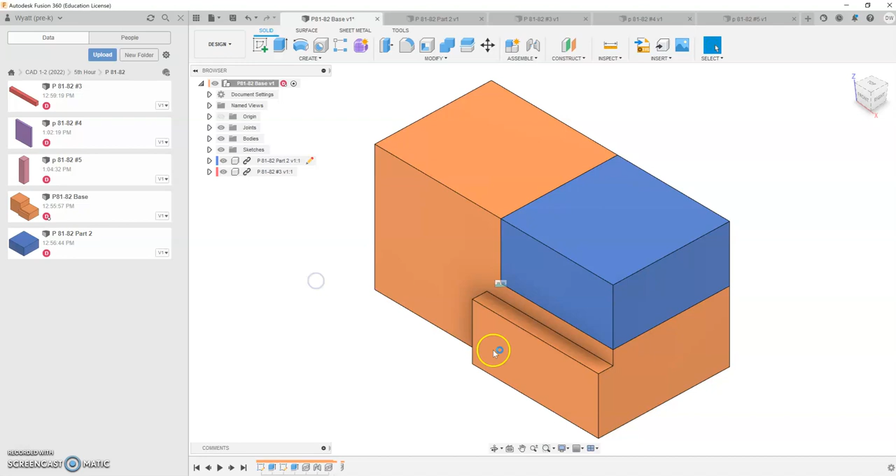Again, I don't want it right on top of there. I'm going to pull it out like so. And just for the heck of it, I'm going to put mine into this position that's a little bit different than yours, probably came in, just in case yours would have came in this way so I can show you how to fix it. So let's say you brought it in this way. I'm going to go ahead and go okay there.

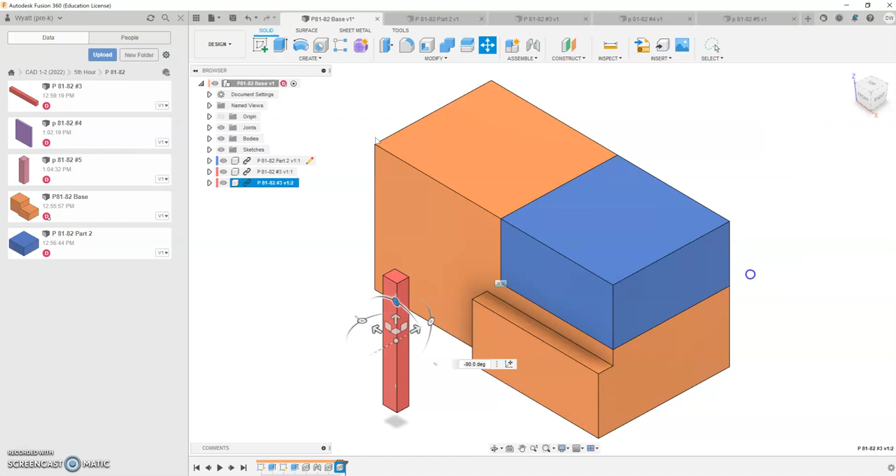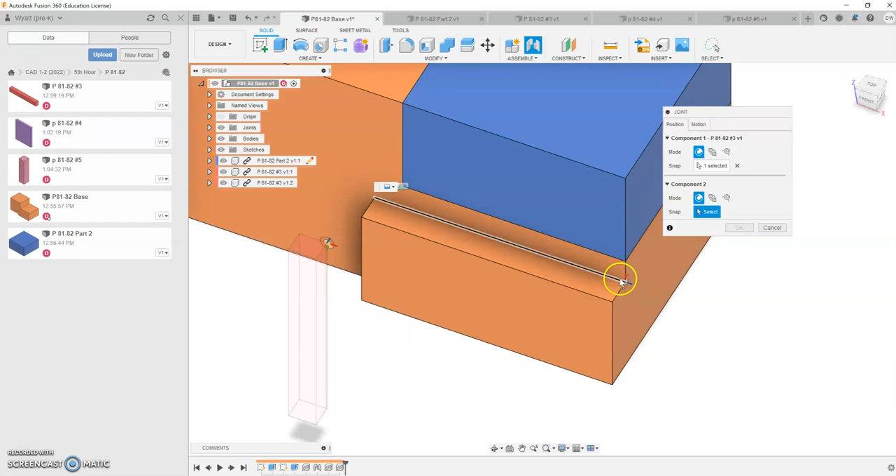So now I'm going to go ahead and do a joint. So let's come up here to my joint. I'm going to pick the back side over here. I'm going to pick this corner on this surface right there. And if I visualize this and rotate it in my hand, that corner should line up right there.

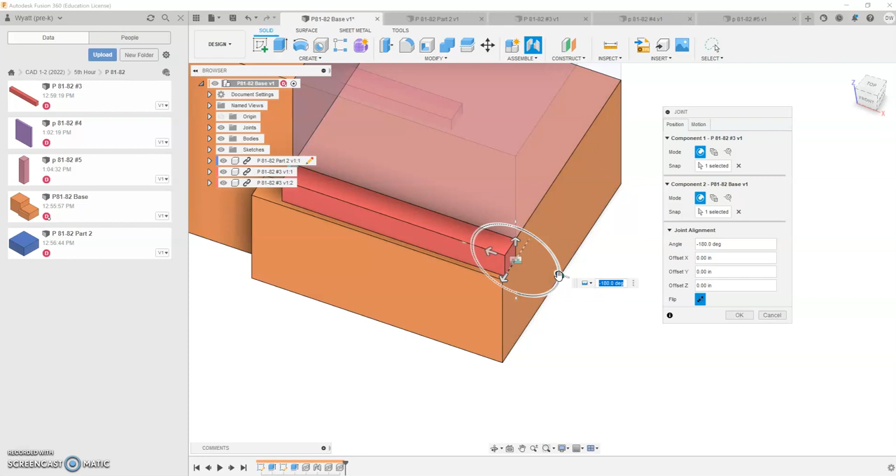Okay, so now it's in the wrong position. But what I can do there is, again, the same things that I rotated with just a moment ago are here. So all you do is grab this one, rotate this piece up like so. And, yep, minus 180 degrees and go okay.

All right, so there's my piece into place. Oh, now, wait a minute. That piece doesn't fit the greatest. I don't know why, I don't know who designed this piece, but for whatever reason, it doesn't fit the greatest. We need to take a look and see what's wrong with that piece.

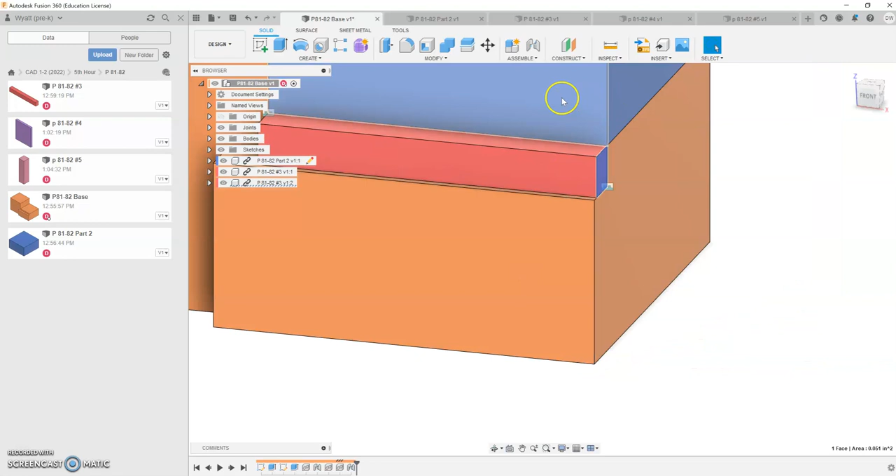So we're going to go up here. That was part number 3. And actually, I guess I could measure this first. Let's see what this block should be here. Right there, that one should be, all right, 0.25 inches. Okay, measure this one, it should be 0.25 inches. All right, so that's good.

So now let's go to our part 3, see what I did wrong. And let's go to our sketch. Well, our sketch measures 0.25 by 2, so that's okay. Let's go to our extrusion. 0.205, goodness, somebody can't type. So go 0.25, go okay.

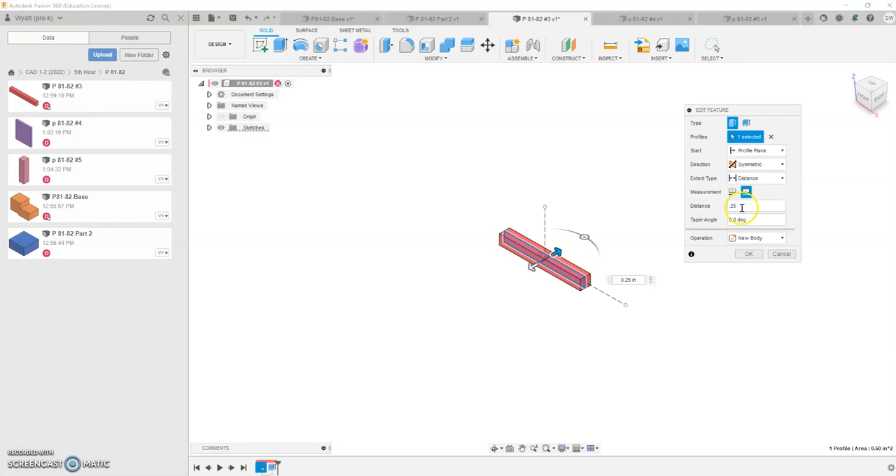It fixed that. Now remember, you do need to save that part. So I'm going to click up here on save and go okay. Come back to my base view. Come back to my base view here. And notice it's still wrong, but I have this exclamation point up there that says it's out of date. So let me update it. And look how beautiful that is. That piece fits in there very nicely.

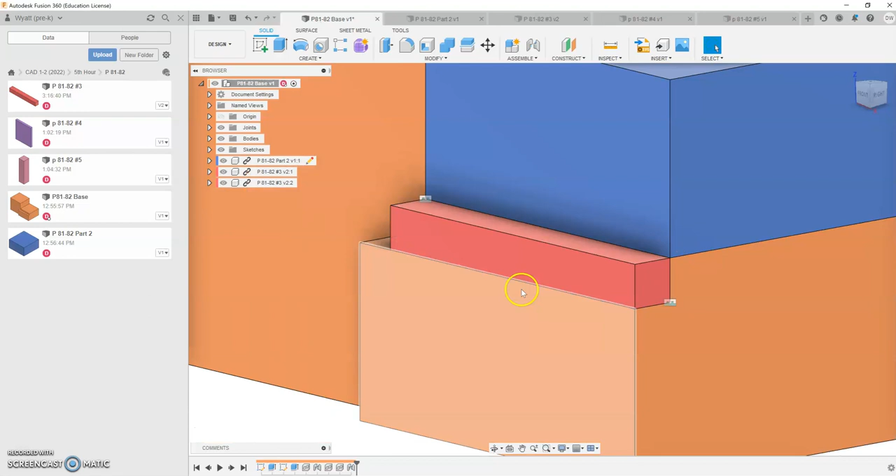Okay, so there's that part. Now let's see what I want to do next. Let me pull in part number, I guess, 4. I'm going to pull in part number 4. Part number 4 is there. I'm going to move this. Whoa, I'm going to move it out in my position here.

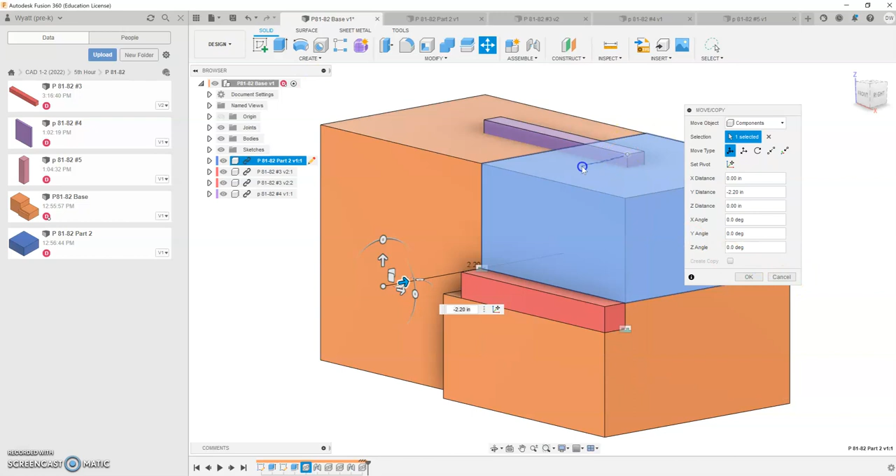Oh, and I messed up there. I did not get it moved. You know what, I'm just going to cancel because I got that off of there and I didn't actually move it. I'm going to go cancel and I'm going to undo that. I'm just going to stick it back in there again. So let me stick in my part number 4 again.

All right, there's my part number 4. I'm going to grab that. There we go, I moved it that time. The other time, I obviously did not get it moved quite right. I'm going to pull it out here a little bit so I can easily get on that back side of it, and I'm going to go okay.

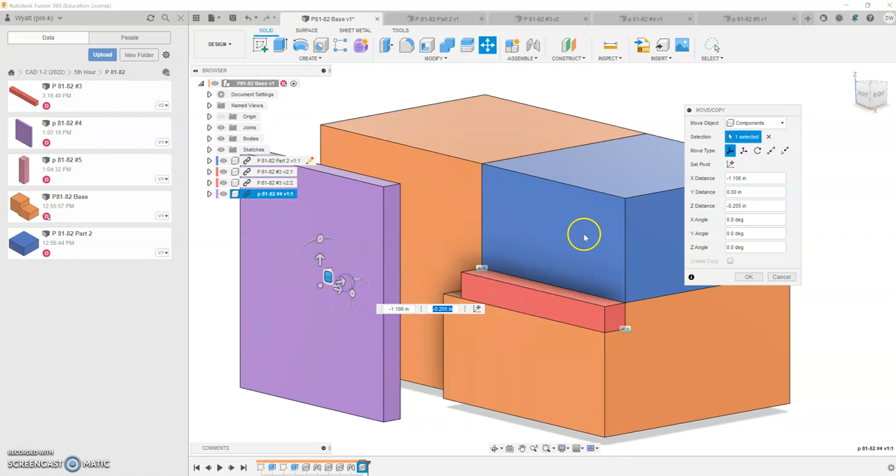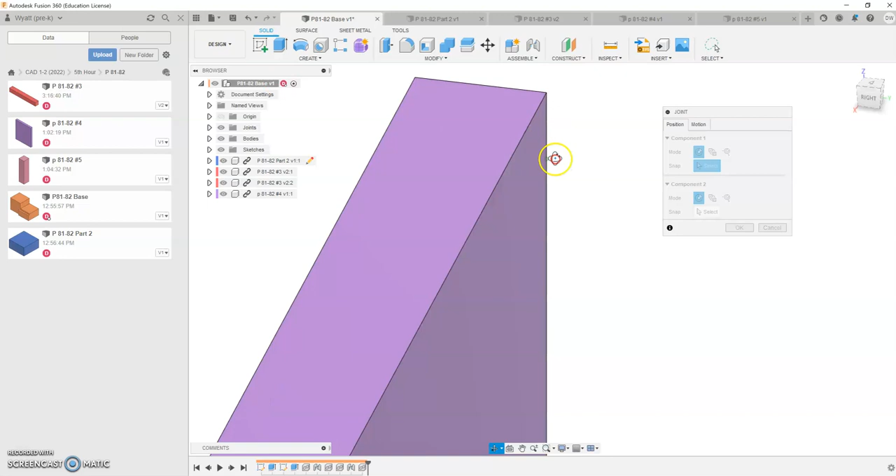All right, so now my part number 4, I'm going to come over here. I'm going to go ahead and use my joint. I'm going to put this corner right here on this surface. Come on, sometimes it's hard to get it on there. All right, there we go. Sometimes it's easier to rotate it around a little bit. There we go, that corner to that corner.

All right, that lines up there pretty good. Once again, that thickness is messed up. I don't know who designed these parts. So I'm going to go back there.

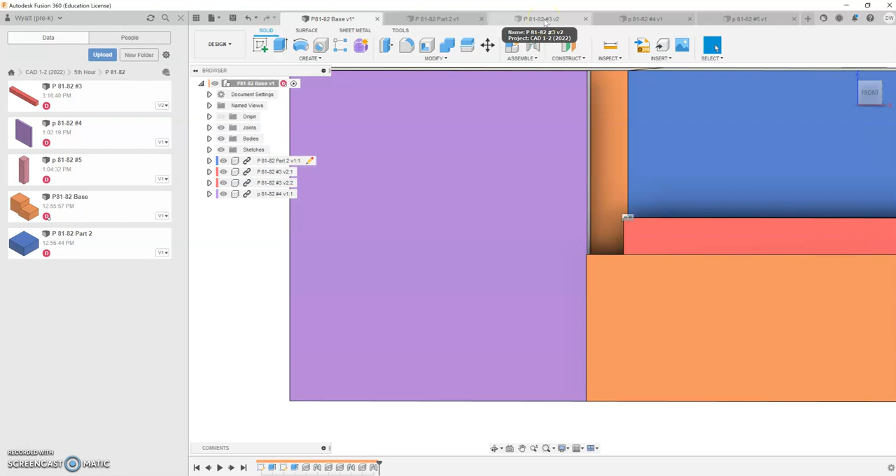That was part 3. I'm going to come up here to the top to part 3. Oh, was that part 3? No, that was part 4. Sorry, that was part 4. Go to my part 4.

That's on my extrusion, so I'm going to double click on my extrusion. Again, 0.205 - who's typing in here? Set that to 0.25 and go OK. Once again, save it.

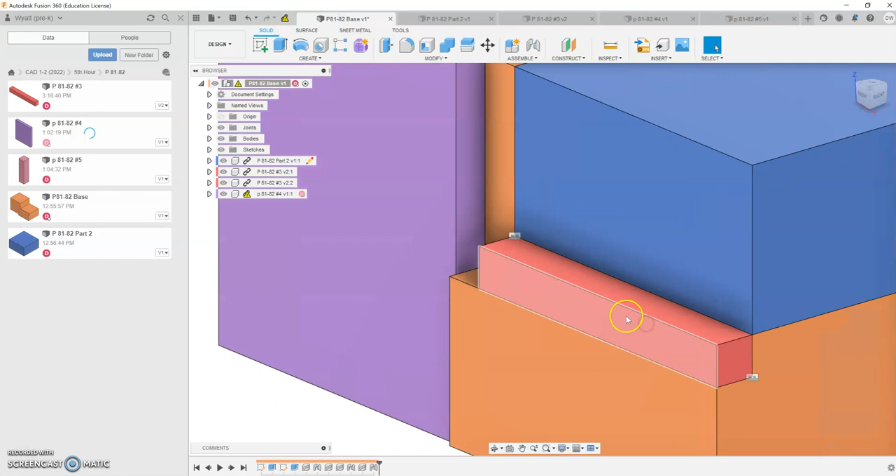And go back to my base drawing. Once again, I have to update it. And there we go. That's nice.

All right, let me pull in my part number 5. Again, I'm going to pull my part number 5 out here a little bit. All right, there's my part number 5. I'm going to go OK. And part number 5 just goes right here for mine.

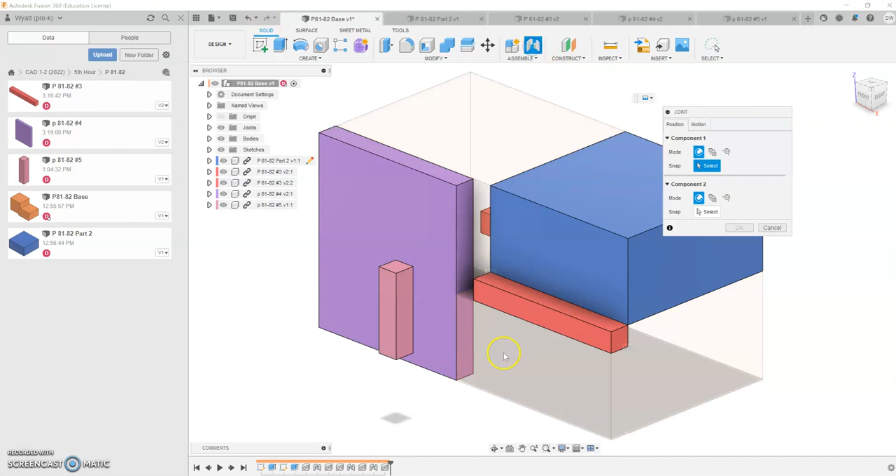Again, you could have made your parts however you wanted to. I'm going to put my joint on here. I think I'm going to join this corner to right here. And just go okay. All right, so there.

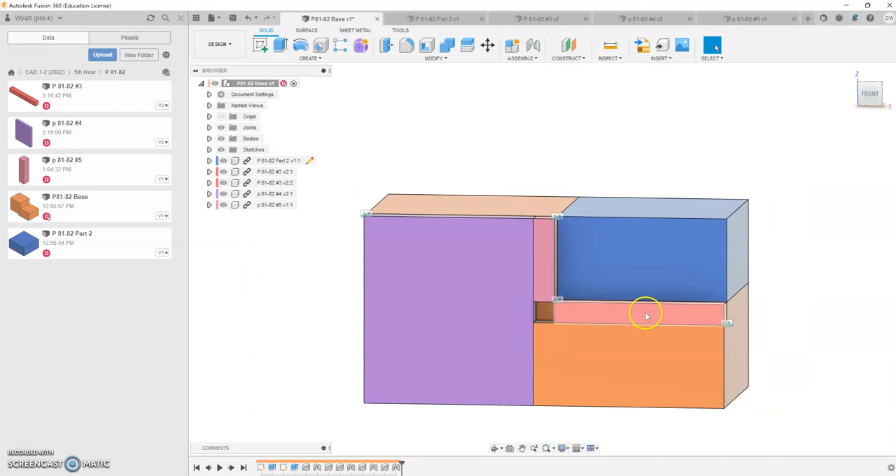Well, I have it in there. That one is right thickness, but oh gosh, who designed these parts? I've got the 5 required parts, but I'm not filling in this entire block. I have some mistakes there.

So this red part here, I should have made it this height. I should have made it go all the way up to the top. So I want to redesign that. So I'm going to go ahead and measure this.

And you can measure this way also - we didn't look at this before. You can measure from this corner to this corner. And that tells me that is a distance of 1.25. So I need to change that part on this one, which if I reference over here, that's part number 3.

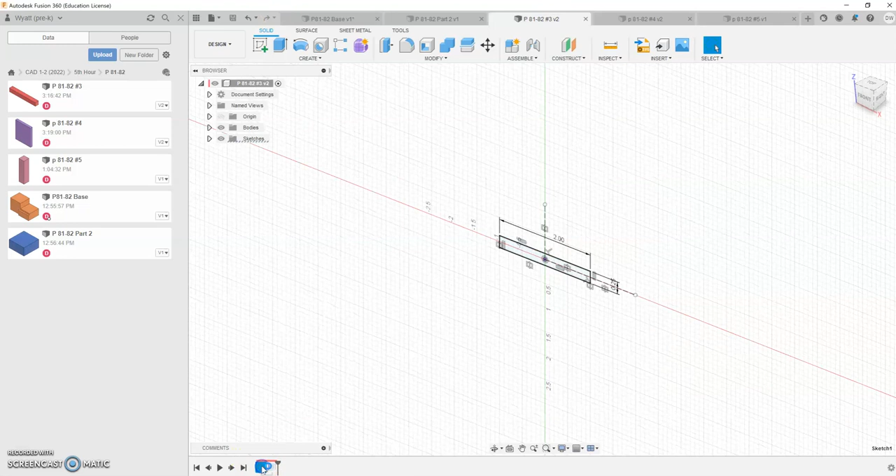So I'm going to go over here. I'm going to go to part number 3. I'm going to go to my sketch of it. And instead of 0.25, I'm going to make that 1.25. And go OK. Oops, OK, first enter, and then finish sketch. Again, remember you have to save it.

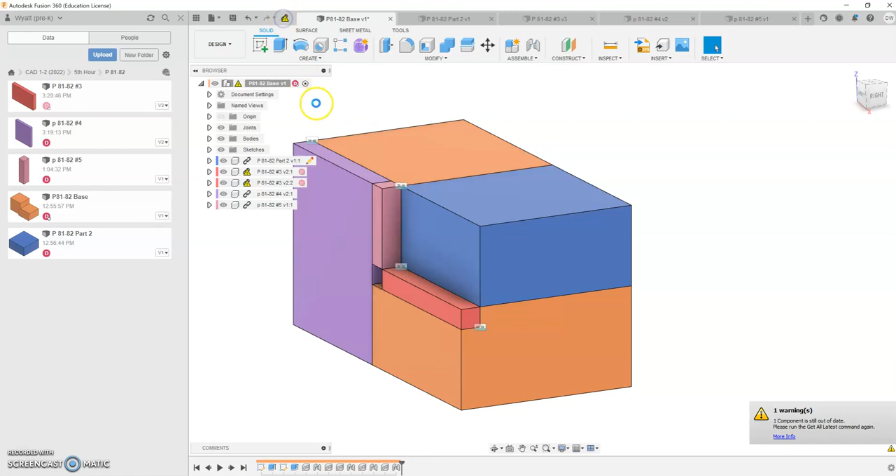And go back to my base. Update. Maybe - update, try that again. There we go, ah, look how nice that fits. So I'm looking good. However, there's my little pink piece.

My pink piece still doesn't quite fill in there. So to do that, I got to make that pink piece longer. Well, remember I just measured this - it's going to be the same length. So it needs to be 1 1/4.

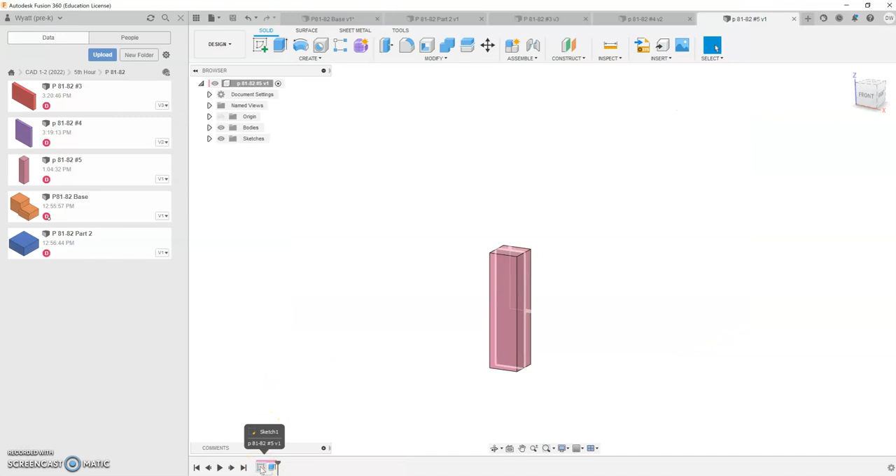Pink piece reference over here is part number 5. So I'm going to go over here to part number 5. Again, that's going to be on the sketch. So I'm going to go to my sketch, double click on it. And instead of 1 inch long, we're going to make that 1 1/4.

And that's great. Finish your sketch. Save it. Go back to my part or my base and update it. Oh, look how beautiful that is.

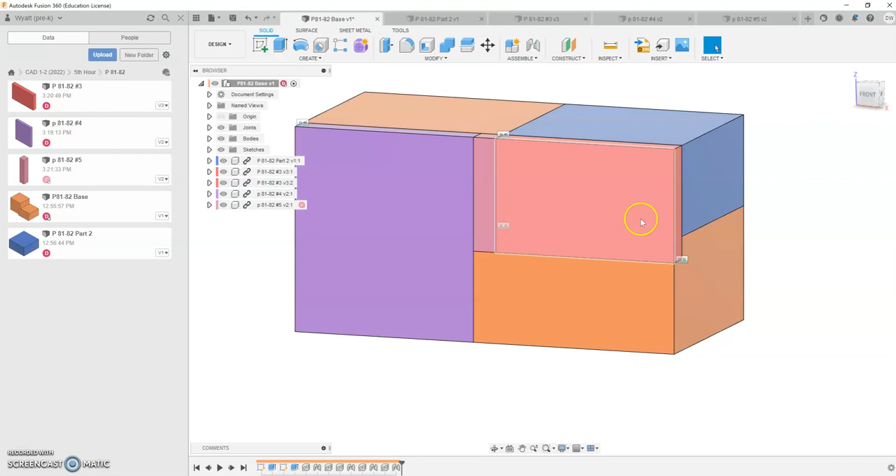That is a very nice looking drawing number 2. And that's great, that's exactly what I'm wanting. Put that in a nice isometric view, do a screenshot of it, and you're going to be beautiful.

Now, one thing you notice out here on the screen, I have these things showing up. Those are some of my joints showing up - those are my joints showing up. Sometimes you don't want those showing up.

So up here underneath where it says joints, if I hit that plus arrow, notice they're all there. I can turn the little eyeball off on them. So there and there and there and there. That just cleans up the drawing and makes it look really sharp.

I'll zoom in there just a tiny bit more. And right there, that's beautiful. Do a screenshot of that and save that to student view. And I'm going to be happy as heck. That's a good accomplishment for today. Get that done and you'll be great. Good luck.